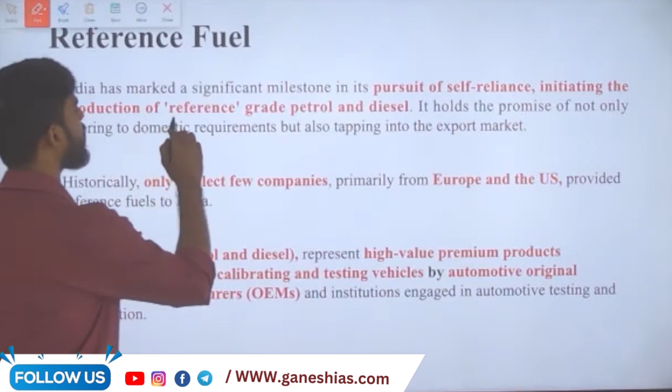India has marked a significant milestone in its pursuit of self-reliance by initiating the production of reference grade petrol. We are producing reference grade petrol as well as diesel now, and it holds the promise of catering to domestic requirement and tapping into the export market. But at present we are heavily dependent on importing this reference fuel. Historically only a select few companies, primarily from Europe and the US, provided reference fuel to India, but now we have started producing it.

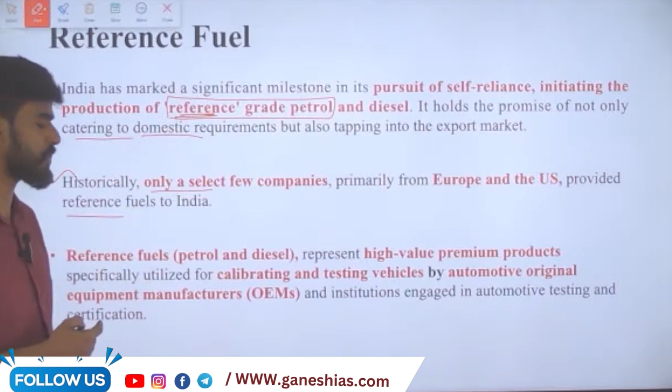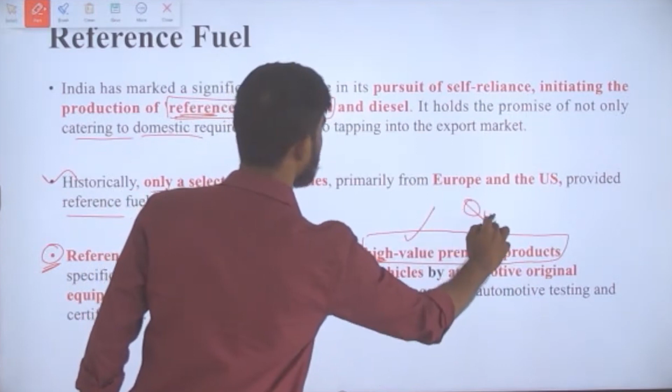What is reference fuel? It includes both petrol and diesel. It represents high value premium products, which means its quality is very high.

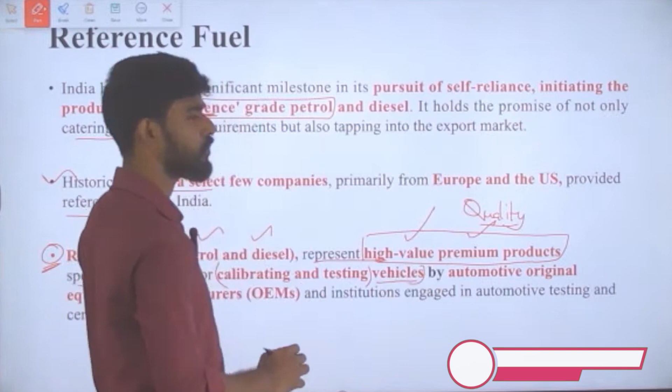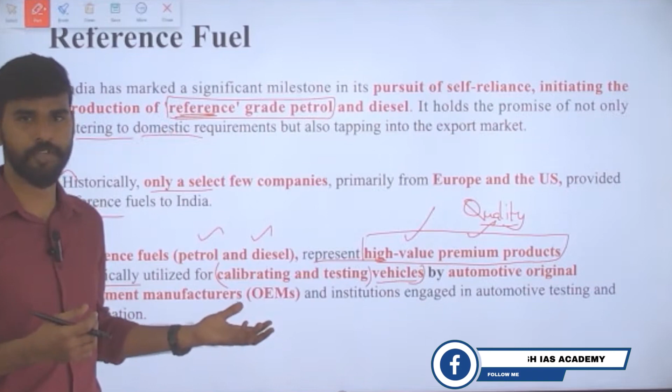These premium products are specifically used for calibrating and testing vehicles. Before a vehicle comes to the market, it has to be tested, so these reference fuels are used there. It has to be of the highest quality, and this quality check or calibration is done by automotive original equipment manufacturers and institutions engaged in automotive testing and certification.

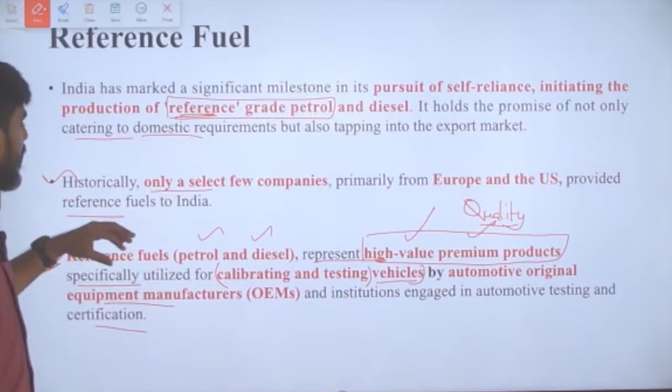At present we are producing reference fuel in India itself. We are no more dependent on other countries for reference fuel.

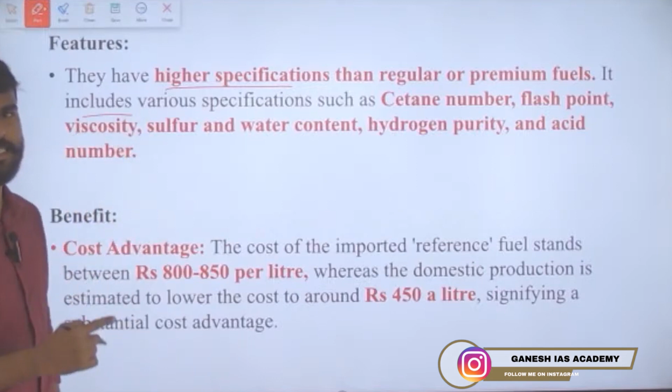What are the features of reference fuel? They have higher specifications than regular or premium fuels, including cetane number, octane number, flash point, viscosity, sulfur and water content, hydrogen purity, and even acid number. So all these specifications follow very high standard quality for this reference fuel.

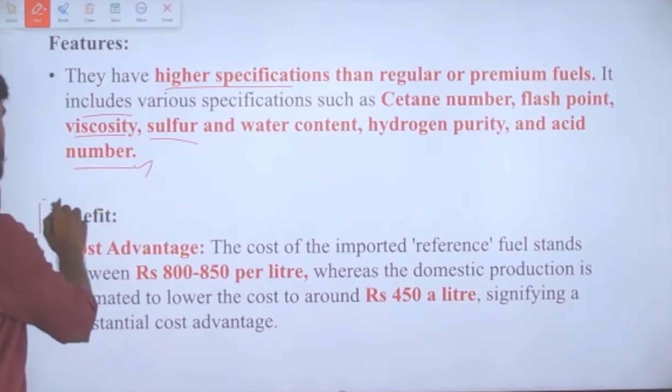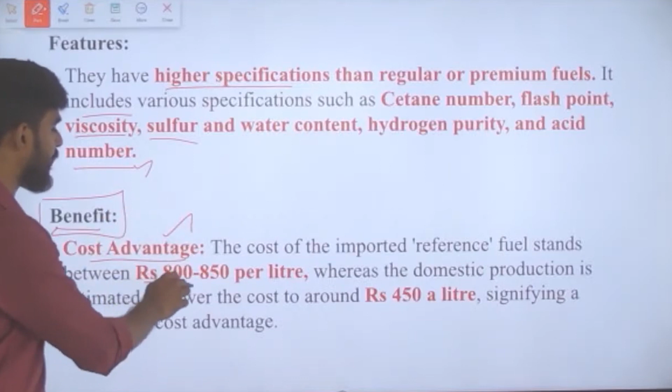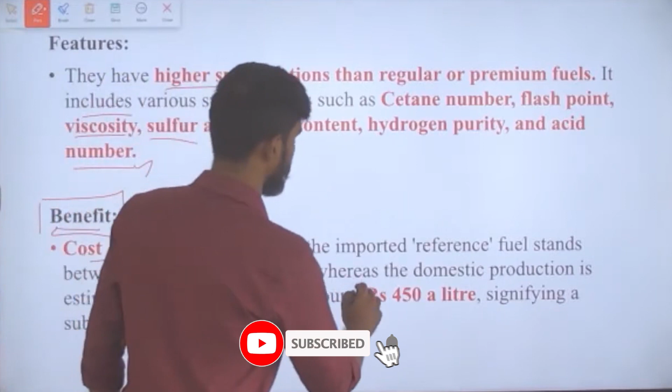What are the benefits of producing reference fuel indigenously? First is the cost advantage. The cost of imported reference fuel stands between rupees 800 to 850 per liter because of its higher quality, whereas domestic production is estimated to lower the cost to around rupees 450 per liter, significantly reducing the cost. This is one major benefit of producing reference fuel indigenously.

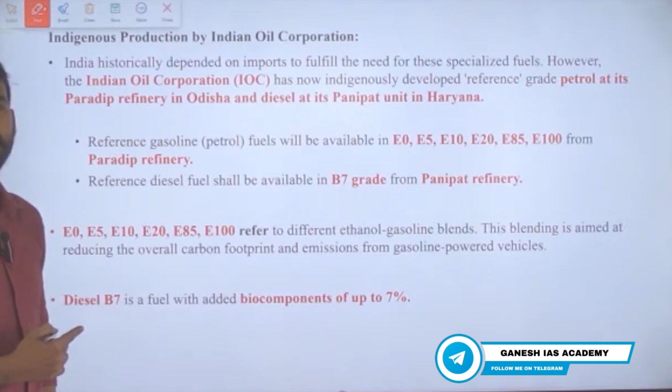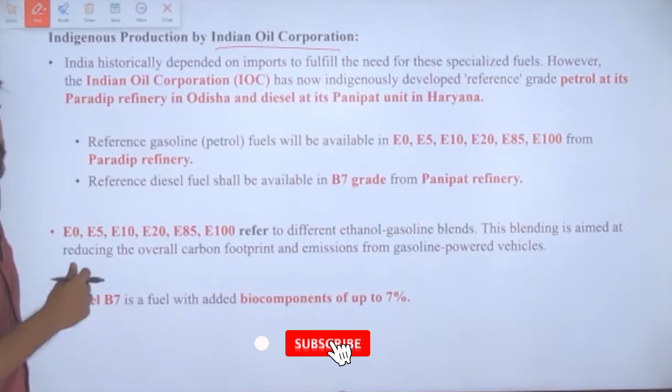This indigenous production of reference fuel is by Indian Oil Corporation. India historically depended on imports to fulfill the needs of specialized fuels, but now Indian Oil Corporation has developed this reference grade petrol indigenously at its Paradip refinery.

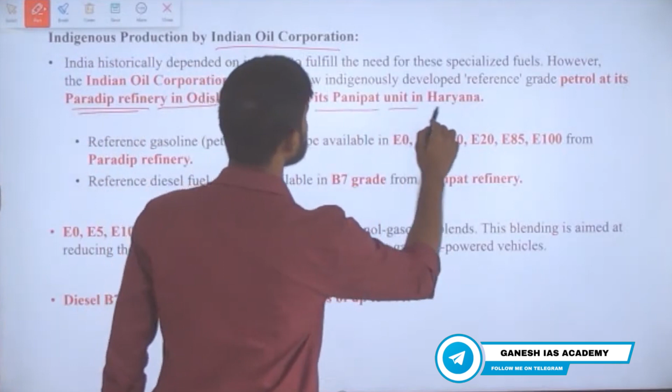Reference grade petrol is produced at the Paradip refinery in Odisha, whereas reference grade diesel is produced at its Panipat unit in Haryana. This is also important to remember.

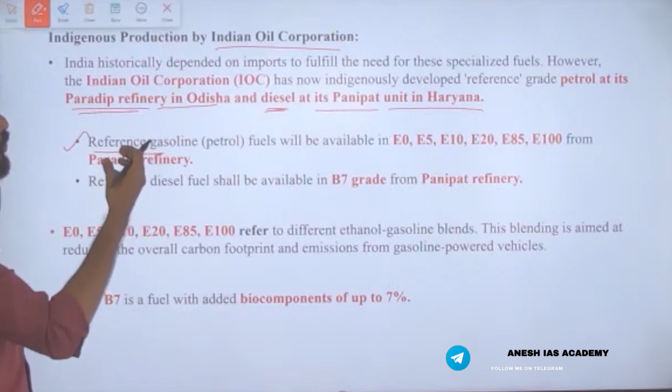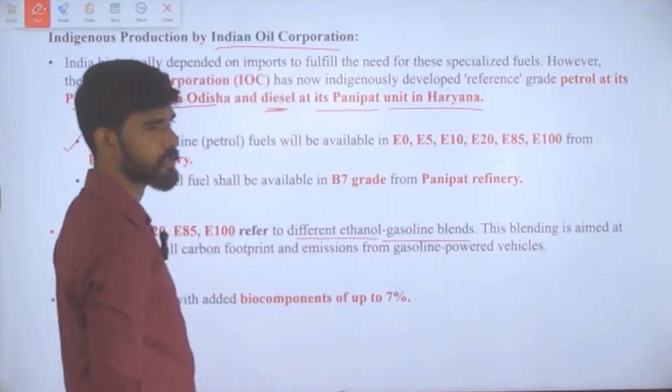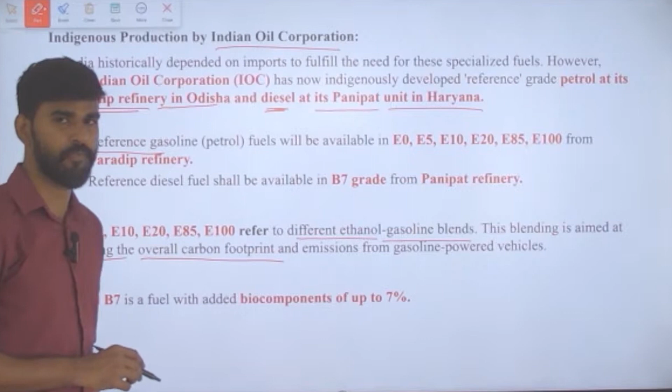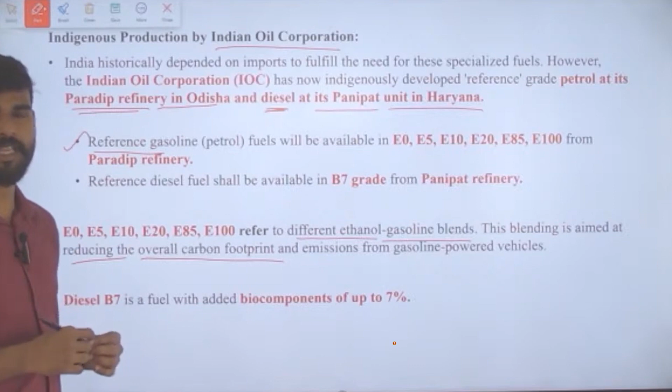This reference gasoline fuel will be available in different varieties: E0, 5, 10, 20, 85 and 100. These are different ethanol-gasoline blends. This blending is aimed at reducing the overall carbon footprint and emissions from gasoline powered vehicles. So to reduce the carbon footprint, we are going for ethanol blending, and all these different types of ethanol blended reference fuels can be produced by the Paradip refinery in Odisha.

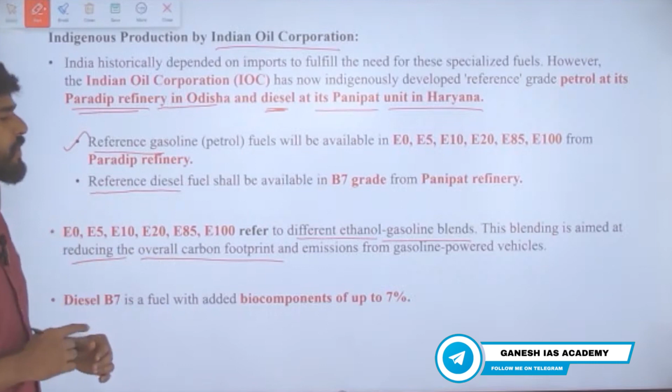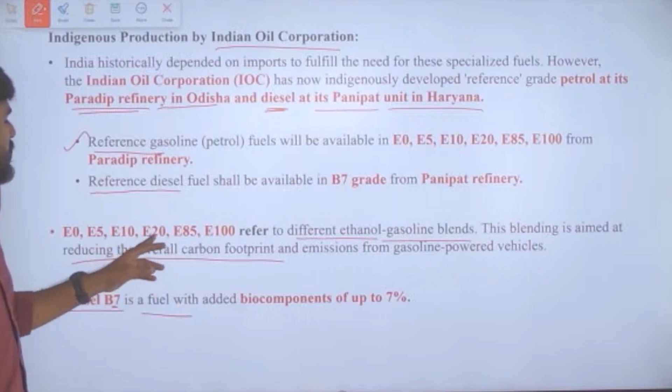There is also reference diesel fuel available in B7 grade at the Panipat refinery. Diesel B7 is a fuel with added bio components of up to 7%. Here the 7 represents the percentage, and similarly the 0, 5, 10, 20, 85 and 100 represent the percentage of ethanol added.

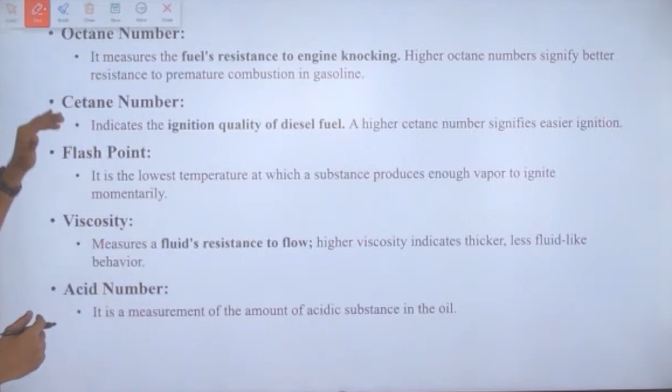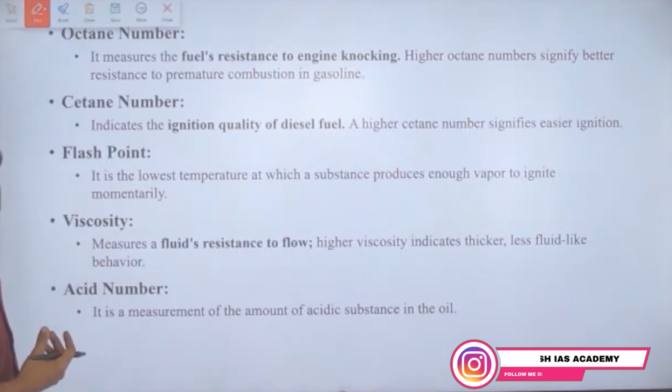We already saw it has many standards and specifications, very high quality ones, including octane number, cetane number, flash point and other things. Let us understand these. Octane number measures the fuel's resistance to engine knocking.

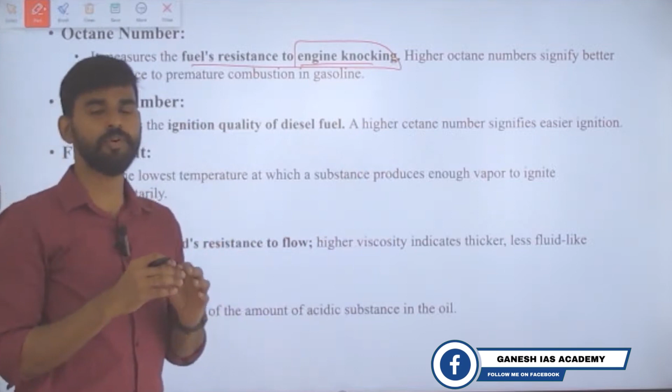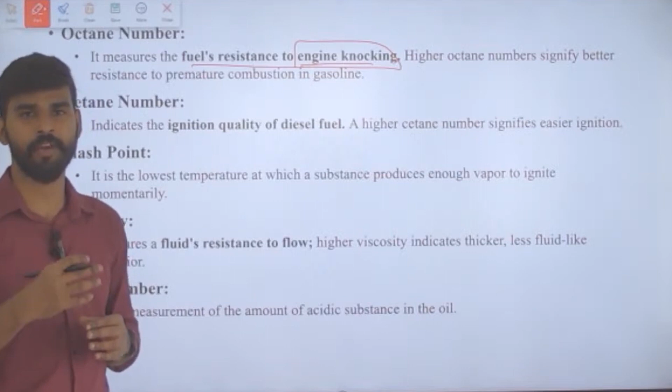Engine knocking happens when there is uneven combustion, so there must be even combustion for knocking to be prevented. When a fuel has a higher octane number, even burning or ignition will happen. So a higher octane number signifies better resistance to premature combustion in gasoline, which is what causes knocking.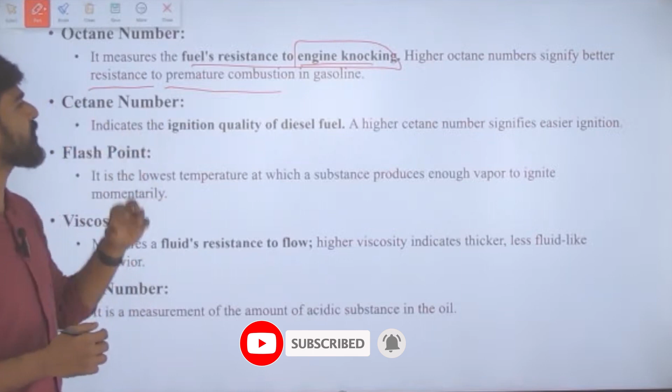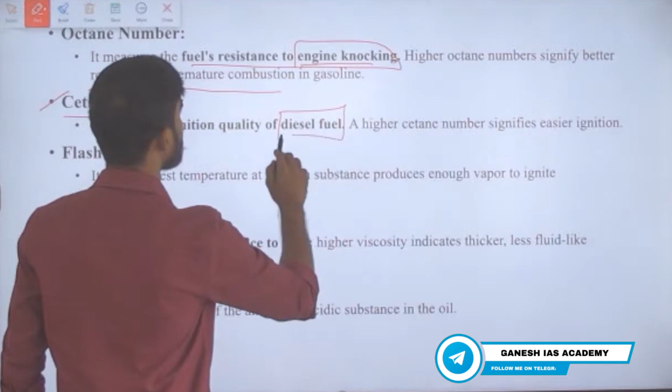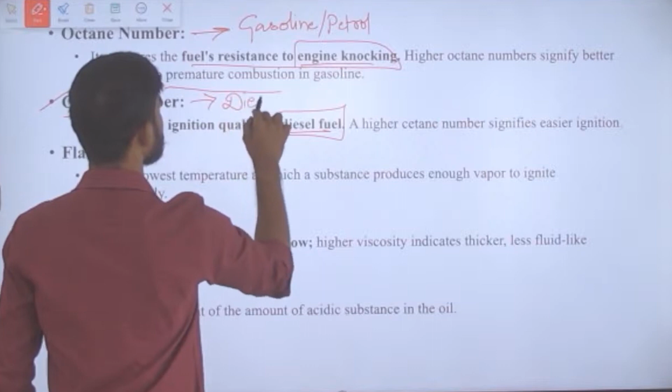Next is cetane number, which indicates the ignition quality of diesel fuel. Octane number is for gasoline or petrol, whereas cetane number is for diesel, which is very important. A higher cetane number signifies easier ignition.

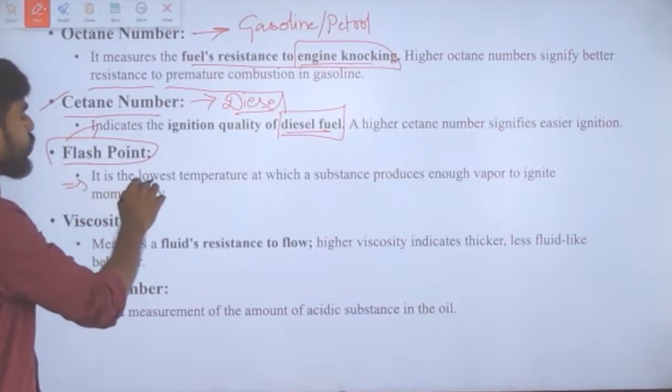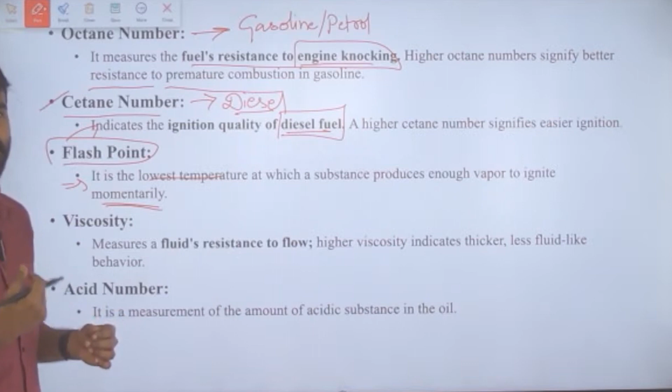Next is flash point, which is the lowest temperature at which the substance produces enough vapor to ignite momentarily. That temperature is called the flash point.

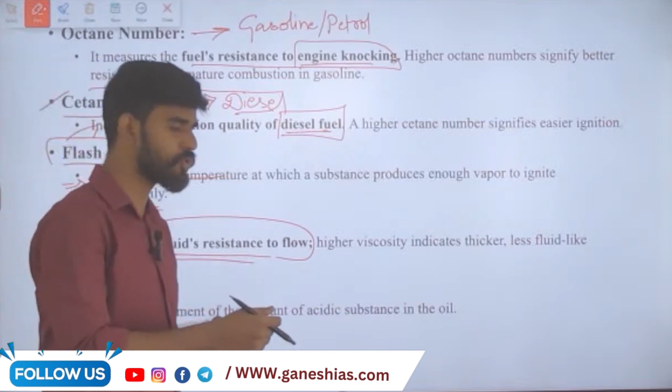Next is viscosity, which is the measure of a fluid's resistance to flow. Higher viscosity indicates thicker and less fluid-like behavior.

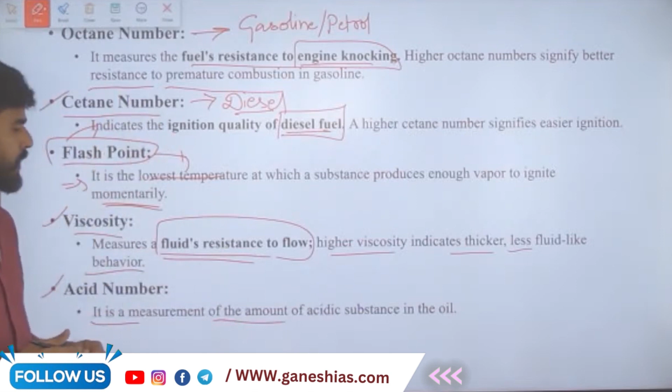Next is acid number, which is the measurement of the amount of acidic substance present in the oil, either diesel or gasoline. This is the detail we need to understand regarding reference fuel.